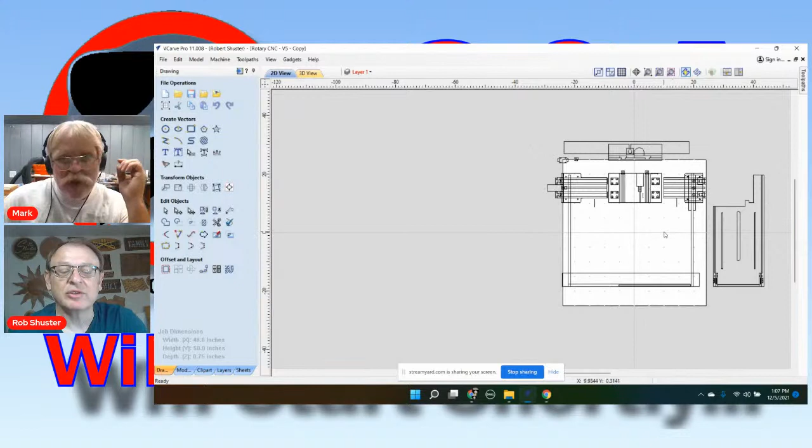Share screen. This is scintillating entertainment. I mean, I love StreamYard. I use StreamYard for my live broadcast, but they haven't made this screen sharing easy. Okay, here we go. All right, there we are. And of course, I'm using my scroll pad, not the mouse, so this can be a little odd.

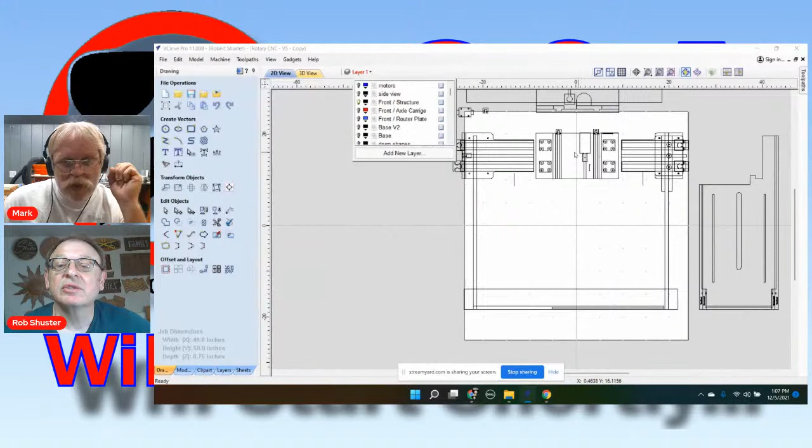But that's V-carve. And I drew it in scale, and I don't know how many layers I've got here. It keeps going and going. Oh boy. That's how I did it. I don't have a 3D CAD program. I use V-carve the whole way. Over here, you can see the side panel, how it fits. And obviously this is the gantry, and that is the machine itself. Those are the visual drawings.

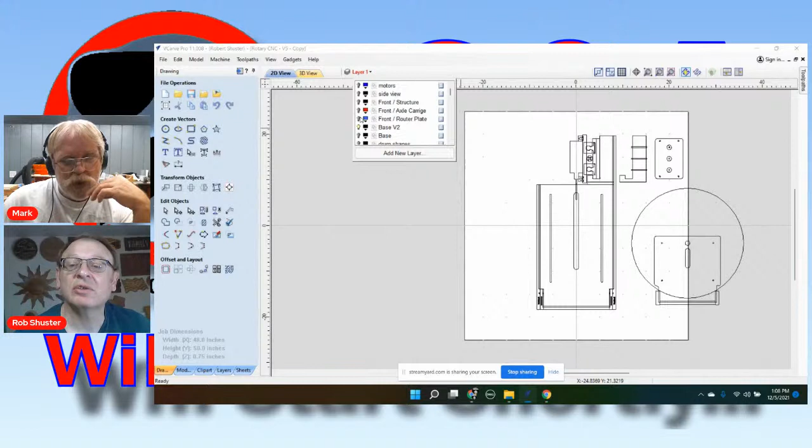I kept going down, and I just figured how big I could go. I kept scaling the circles, the drums, so I think I could do a 24-inch bass drum if I tried, but I have not tried yet. But I can go that big. That's the side there I was doing to figure out how big I could go. So have you pushed the limits of it? Do you know the smallest you can make and the largest you can make yet?

Okay. Hard to explain this. I'm going to switch back from sharing. Stop sharing. I'll move the camera and see if that works. See, for those out in the chat, what I'm doing is I'm teasing it. He's going to show the actual machine itself. Yeah. We got to build up to it. My cords are all tangled here.

I've got a threaded rod on each side. You can see that right there. Got 4 bolts here. I'll loosen the 4 bolts on each side, and then I'll just get a socket driver on a drill, and it'll raise the whole thing up as high as I want to go. So I can get really small. And that is for machining the outside of the drum? Well, yeah, but I've done little things too, more than just drums.

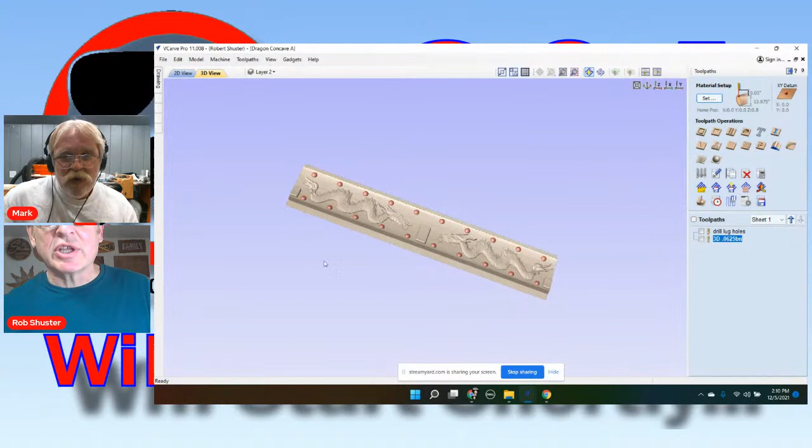I mean, it's not rocket science. I really thought it was going to be, and before that, it really was. Now, without making the world's worst pun, it is a lot to wrap your head around until you've done it once or twice. And then after that, it's much like anything else. It becomes, what was I worried about? You can go back and forth between the Rotary view, but for design work, I always like it this way so I can see. I don't have my mouse, so I can't do all the things I wanted to do, just using my touchpad. Okay. I see what you're saying.

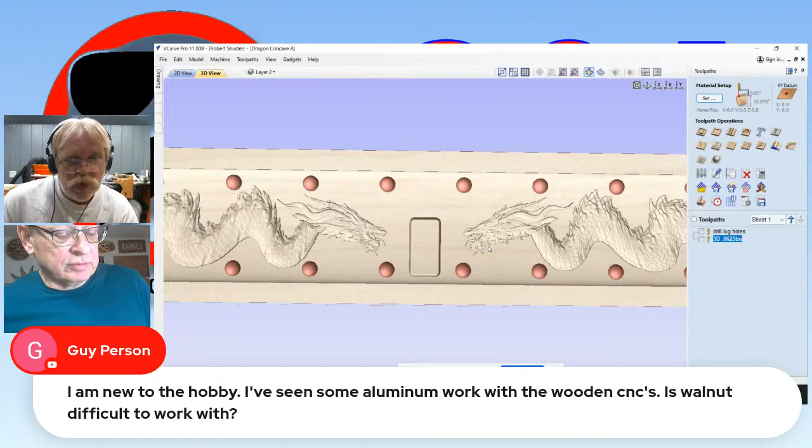Now, Guy, pardon me if I mispronounce your name, wants to know, do you ever do inlays with metal? I have not. He says he's new to the hobby and he's seen some aluminum work with wooden CNCs. Is walnut difficult to work with? Are you talking about inlaying with, say, aluminum in walnut? I've never done it myself. But I have done epoxy that looks like metal, with some metallic tints, just a basic shape and epoxy, and that looks really cool. It's a metallic look, but it's not real metal.

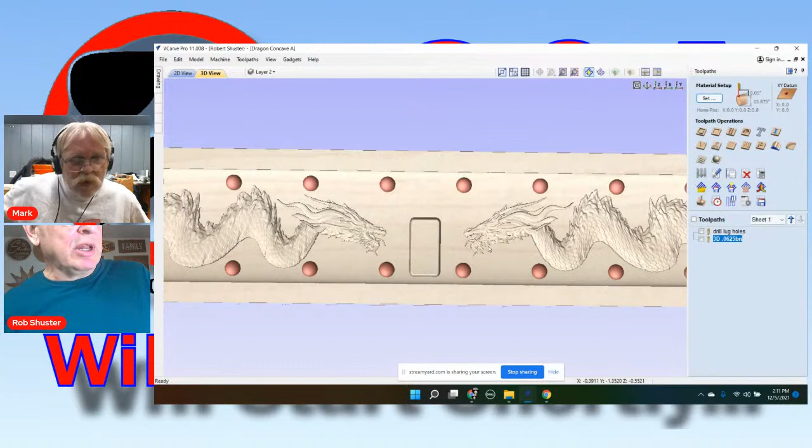Yeah. Now, if you just wanted to know about walnut as a material to cut, it's one of my favorites to work with. It machines beautifully. It cuts like butter. The only thing I would suggest is that you practice in scrap because walnut's pricey. And if you get a good result in your scrap, it's going to be an excellent result in walnut, because walnut just cuts beautifully.

And the thing I'm toying with right now is, should I make the lugs? That's gorgeous. Yeah, and that's the exact same woods. I have no finish, of course, so it doesn't look right, but that's the exact same woods. Got the guts inside there. Let me put the drum down so I don't drop it. That would be bad. Okay, I'm scrolling back up to find some questions that I saw but had to kind of let go by.

Let's see, getting back up here.

Okay, Brooks Martin wants to know, are you using yellow glue or epoxy glues? I use Titebond 2, that's what I use always. I buy Titebond 2 by the gallon. But for that drum, I wanted to grain fill, so I did use some epoxy. It's called finishing epoxy. It was in the video.